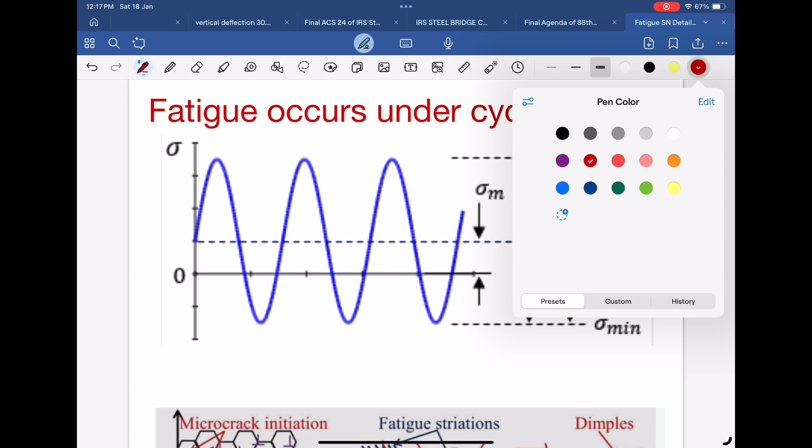Fatigue in steel refers to the phenomenon where a material experiences failure under repeated or fluctuating stresses that are well below its ultimate tensile strength.

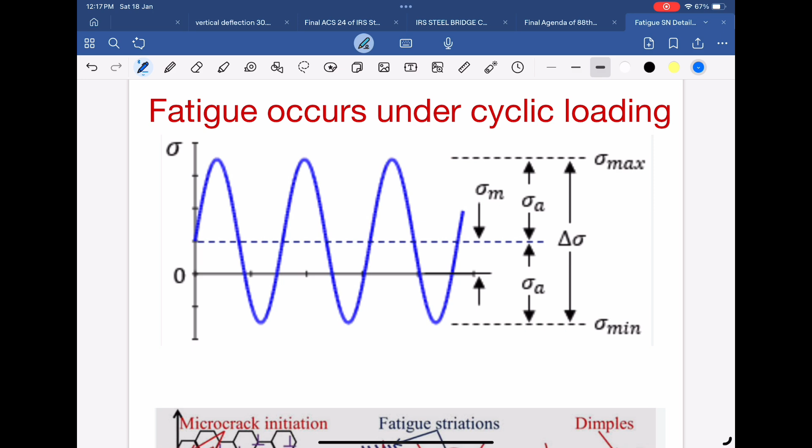This process occurs due to the progressive accumulation of damage within the material, typically initiated at microscopic defects such as cracks, inclusions, or surface irregularities. Over time, these imperfections grow larger with each stress cycle, eventually leading to fracture.

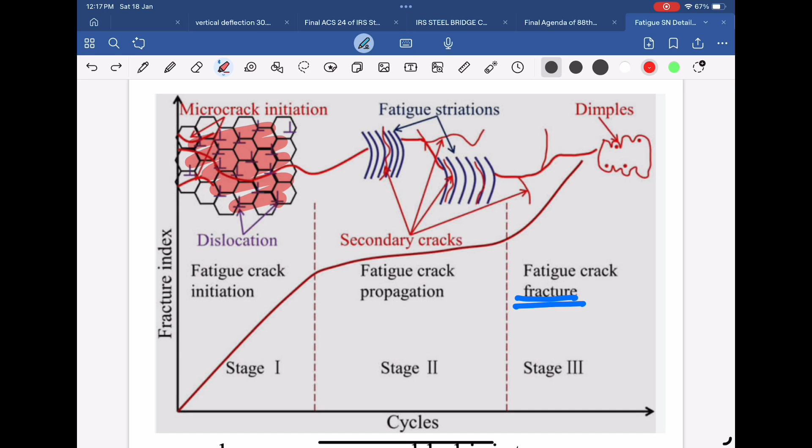Fatigue failure is not instantaneous. It develops in stages. Initially, tiny cracks form at high-stress concentration points, such as sharp corners, welded joints, or surface scratches. In railway girders, it typically starts from rivet holes or bolt holes.

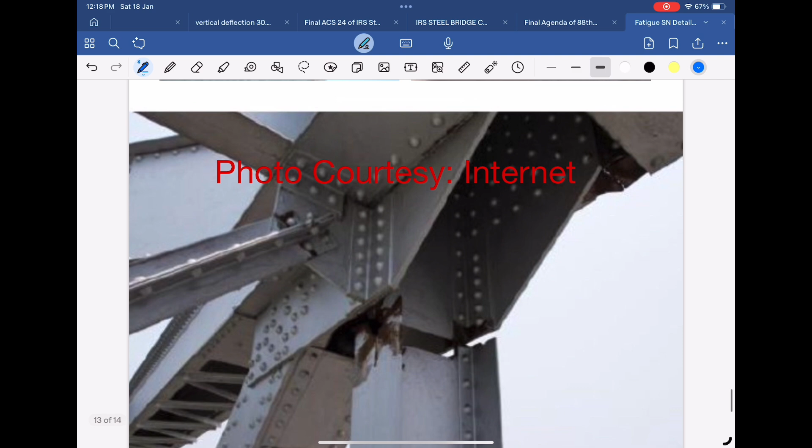These cracks then propagate incrementally with each cycle of stress. The final stage occurs when the remaining uncracked cross-section of the steel is unable to sustain the applied load, causing a sudden and catastrophic failure. This photo taken from the internet shows one such example.

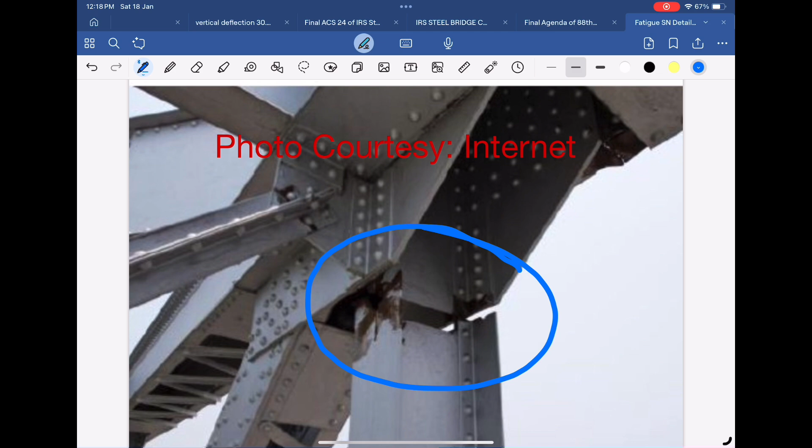With this discussion, we can now appreciate how important it is for bridge engineers to understand the fatigue phenomenon.

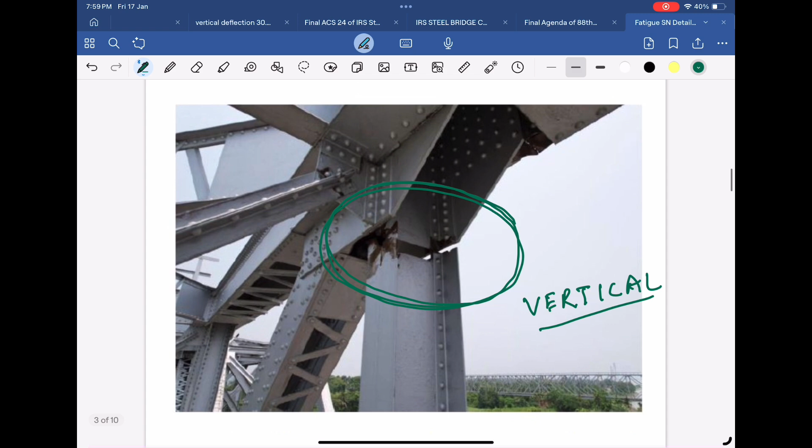With this background, we can start reading the IRS Steel Bridge Code. As per Appendix G of IRS Steel Bridge Code, fatigue in materials is the phenomenon which causes failure of any structural members under the action of repetitive loads.

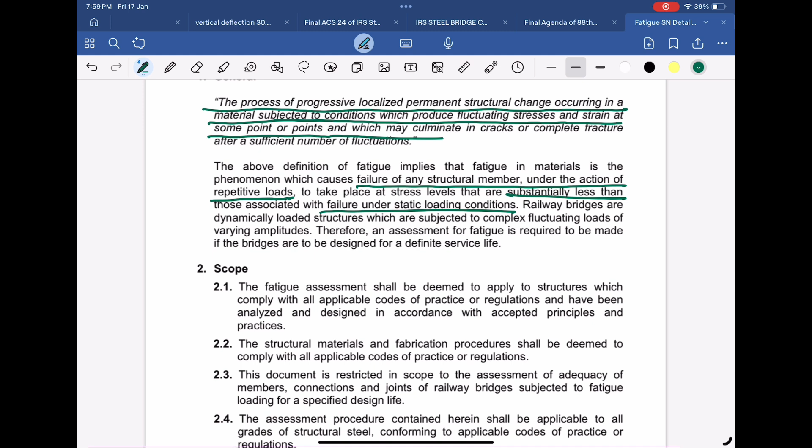Failure of a structural member in fatigue takes place at stress levels that are substantially less than those associated with failure under static loading conditions. For definition purposes, fatigue is the process of progressive, localized, permanent structural change occurring in material subjected to conditions which produce fluctuating stresses and strains at some point or points, and which may culminate in cracks or complete fracture after a sufficient number of fluctuations.

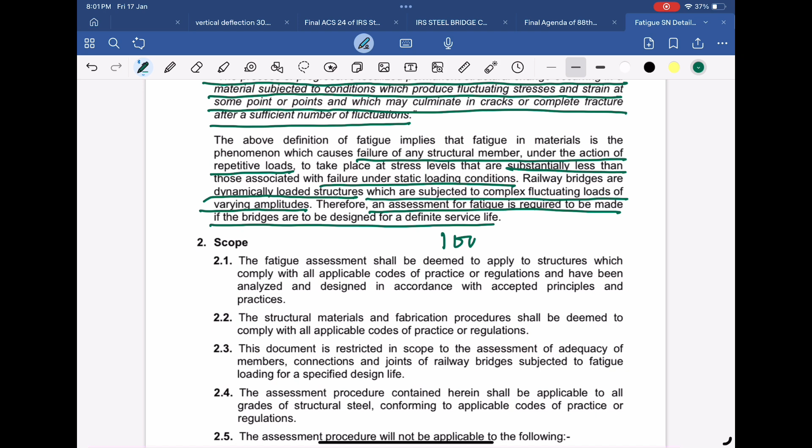Railway bridges are dynamically loaded structures which are subjected to complex fluctuating loads of varying amplitudes. Therefore, an assessment for fatigue is required to be made if the bridges are to be designed for a definite service life. To understand fatigue from a design point of view, first some basic fundamentals need to be understood.

Let's start with the SN curve. An SN curve, also known as a stress-number curve, represents the relationship between the cyclic stress amplitude and the number of cycles it can endure before failure.

The graph plots stress on the vertical axis and the number of cycles to failure on the horizontal axis. To account for the vast range of cycles, from a few to billions, the horizontal axis is typically displayed on a logarithmic scale. The curve usually begins at high stress levels for low cycle fatigue, where the material fails quickly under large stresses. As the stress amplitude decreases, the number of cycles increases, extending the material's lifespan.

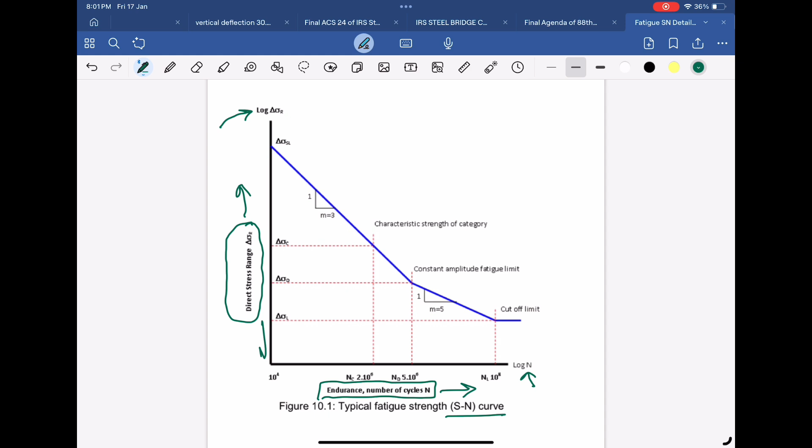For steel, the curve may plateau at a specific stress level, indicating a cut-off limit. Below this stress, the material can theoretically withstand infinite cycles without failing.

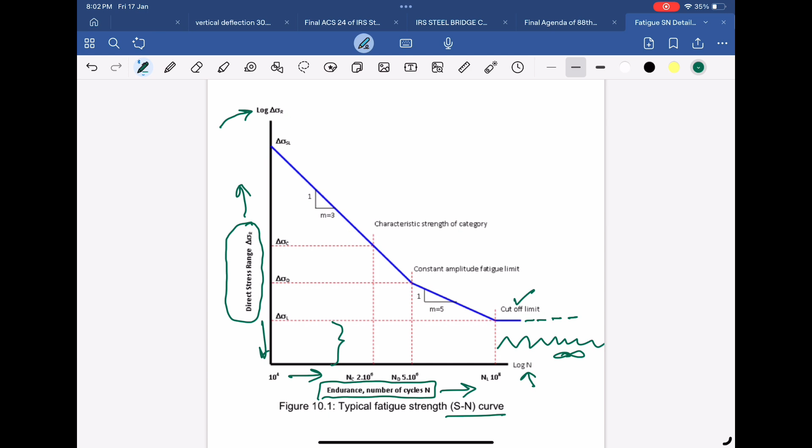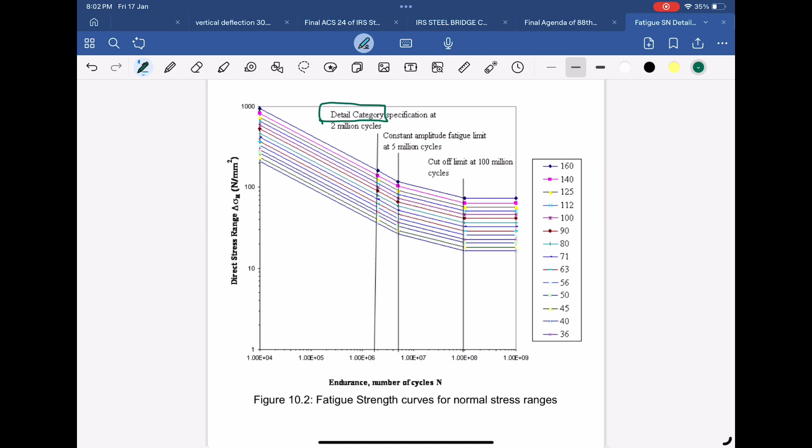In the SN curves given in IRS Steel Bridge Code, you will find that there are many SN curves drawn for different detail categories. It's important to understand what a detail category is. To understand detail categories, we will have to go to Table G-II given at the end of Annexure G.

Detail category refers to a number which represents stress range in Newton per millimeter square, which if applied for 2 million cycles can be sustained by a particular construction detail.

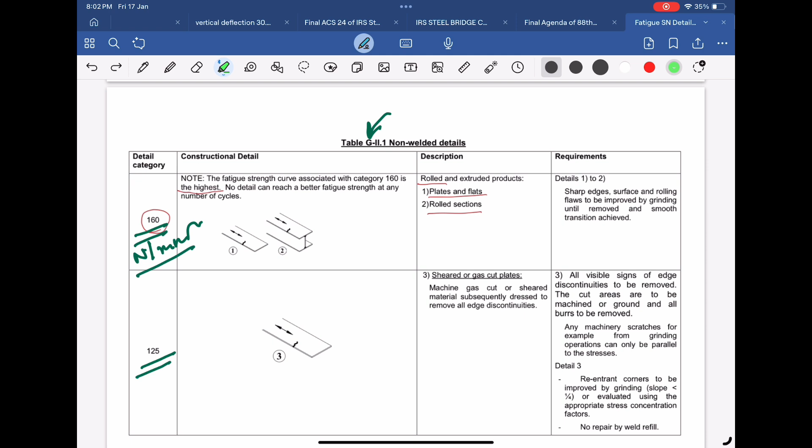Construction detail means the arrangement of steel plates or sections in fabricating a steel bridge member, like cross girder, bottom chord, etc. In essence, how a member has to be fabricated.

It may be a built-up section or a rolled section. It may be connected with other members with the help of welds or bolts and holes, etc. Each such arrangement is basically a detail category.

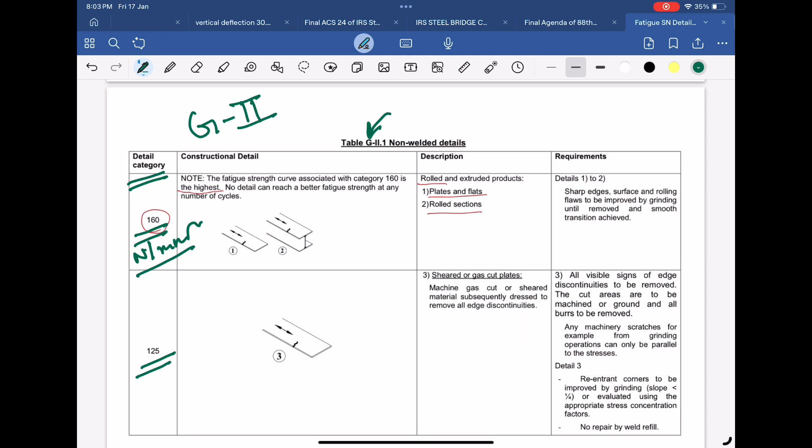All possible types of detail categories are tabulated in Annexure G itself under various tables named G-II. For example, Table G-II.1, which is for non-welded details, mentions a detail category of 160 for constructional detail 1 and 2. This means that a steel structural member made as per constructional detail 1 or 2 can successfully sustain 2 million cycles of stress range of 160 Newton per millimeter square.

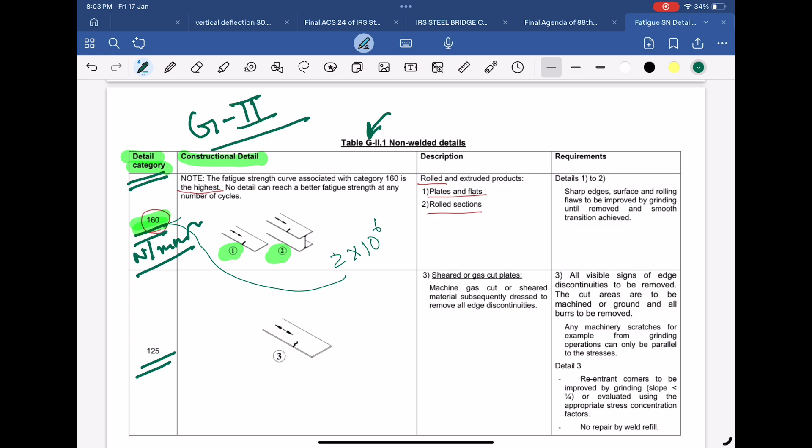Please note that the SN curve is only dependent upon detail category and not on steel grade. Here, detail categories are 36, 40, etc., up to 160, meaning the maximum detail category a construction detail can have is 160 Newton per millimeter square.

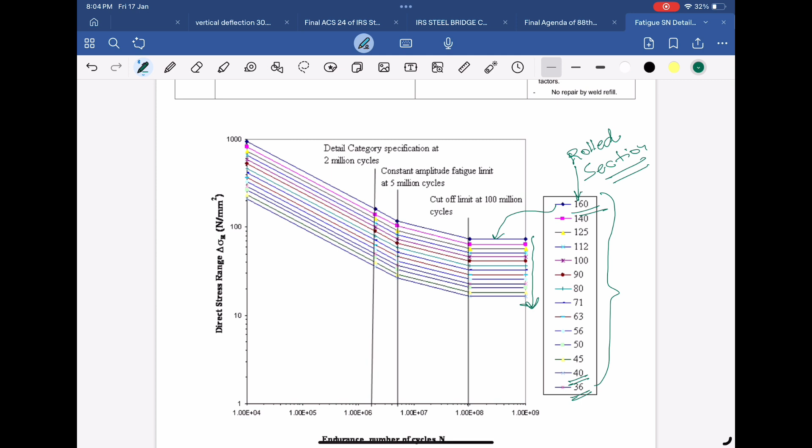This 160 detail category is for rolled steel sections made in factory, which are supposed to have least flaws and irregularities. As we introduce welds, as in built-up sections, and holes for connections, etc., the detail categories keep on reducing. For various construction details, the detail category to be taken may be referred to in Table G-2.

Now let's take an example of the cross girder or stringer of our typical RDSO standard open web girder. It's a built-up I-section with holes at the ends. How to select the appropriate detail category in this case for the purpose of fatigue design?

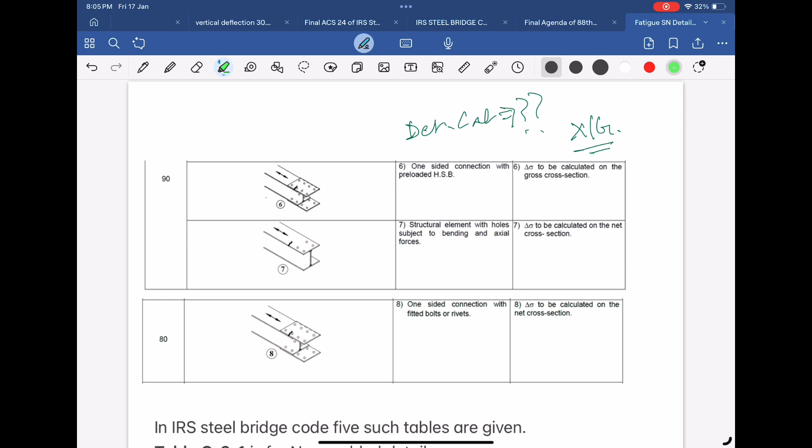In Table G2, there are 3 construction details given which show the I-section with bolted connections matching our requirement of cross girder or stringer. So overall, we have 3 options to choose from: construction detail 6, 7, or 8.

Construction details 6 and 7 have a detail category of 90, and construction detail 8 has a detail category of 80. In fatigue considerations, whenever the exact detail category is not met, the lower one should be adopted. This is legislated in the EN 1993-1-9 code, which is the EN code for fatigue design.

So we will choose a detail category of 80. It means that a cross girder or stringer made as per the chosen construction detail as above can survive for 2 million cycles of a stress range of 80 Newton per millimeter square.

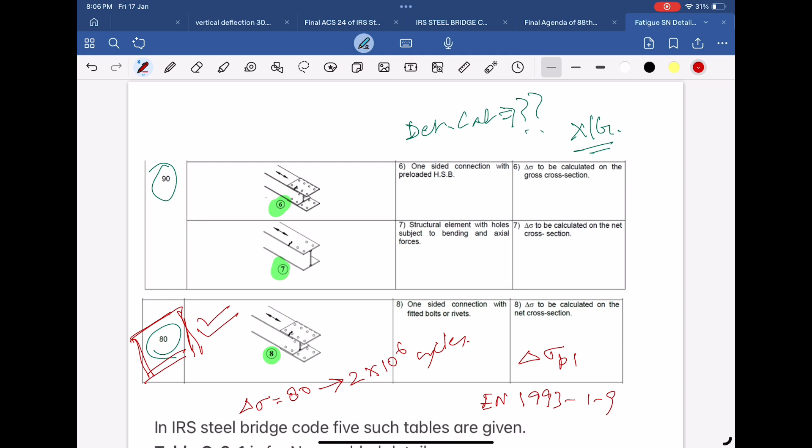It also means that for the purpose of fatigue design, the permissible stress in fatigue shall be taken as 80 Newton per millimeter square. In IRS Steel Bridge Code, 5 such tables are given.

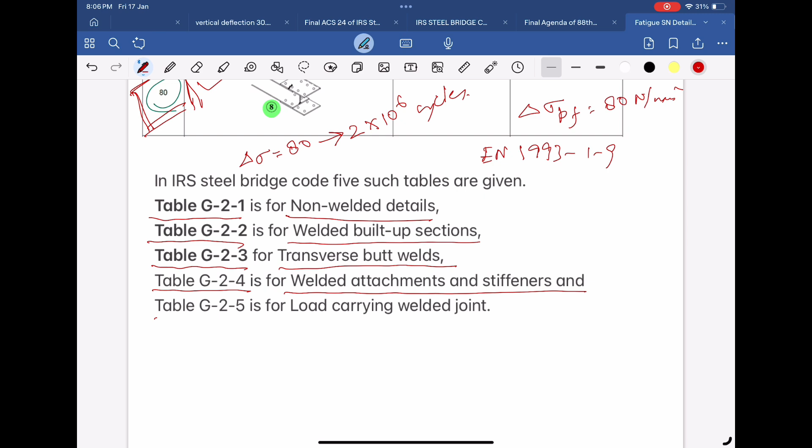Table G-2-1 is for non-welded details. Table G-2-2 is for welded built-up sections. Table G-2-3 is for transverse butt welds. Table G-2-4 is for welded attachments and stiffeners, and Table G-2-5 is for load-carrying welded joints.

It's important to mention here that these tables are exactly taken from the EN 1993-1-9 code for fatigue and were developed after thousands of fatigue tests and real-life design examples.

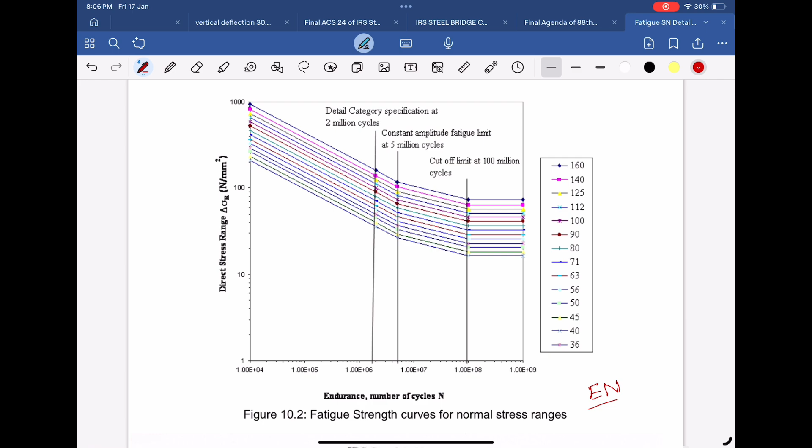The detail categories may appear very conservative, like taking a value of 80 Newton per millimeter square in a steel of grade 250 appears to be highly conservative. But as the bridge has to survive for 100 years, we should not immediately jump to such conclusions.

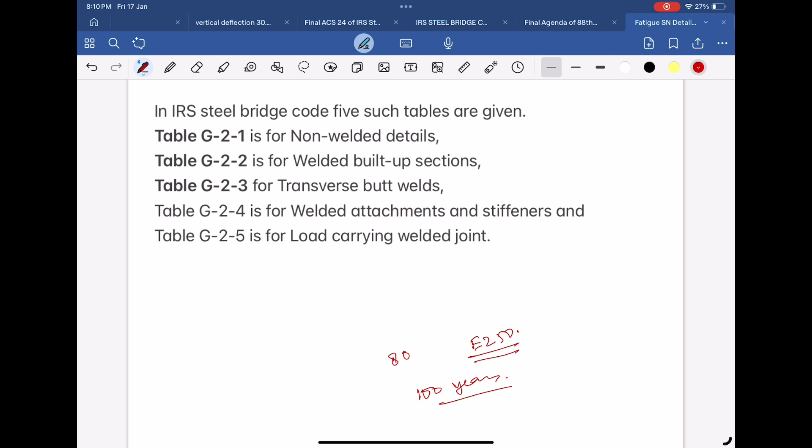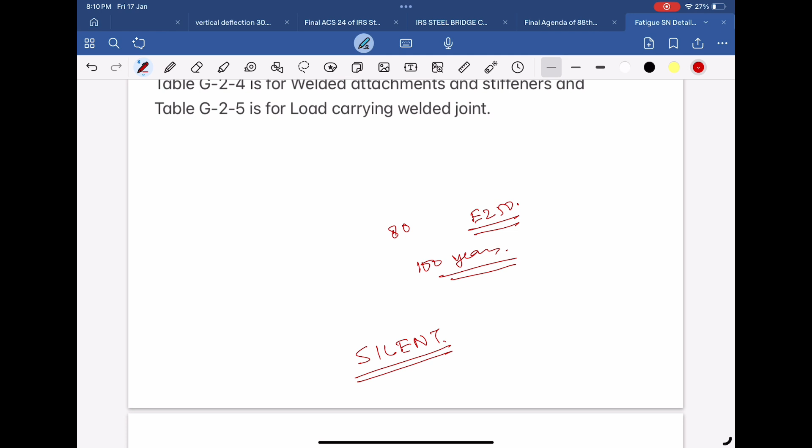Fatigue is a silent phenomenon which remains invisible for a sufficient service life of a bridge. Please note that the detail categories are also basically permissible fatigue stress values used for design, and these are not dependent upon the grade of steel.

The SN curve of structural steel is the same for E250 or E350 or any other grade of structural steel. It is only dependent upon the construction detail, that is, the arrangement of steel plates adopted to form a bridge component.

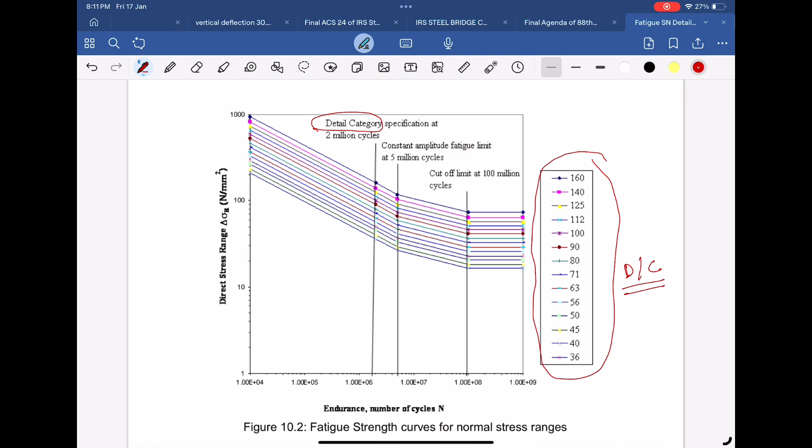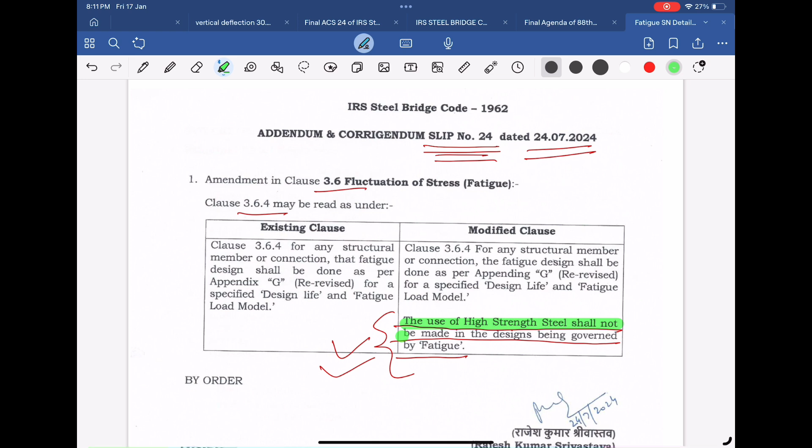That's why the latest correction slip ACS-24 of IRS Steel Bridge Code prohibits the use of steel of grade higher than E250 for designing members which are governed by fatigue.

Tension members, flexural members, and members where reversal of stresses take place are the members whose design is governed by fatigue. Using a higher grade of steel where the section is being decided based upon detail category, which is independent of steel grade, will not result in achieving any reduction in section.

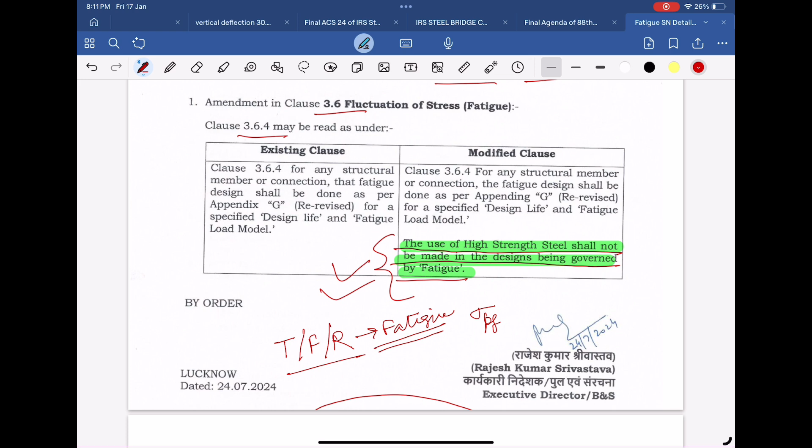For the purpose of understanding fatigue design or calculating residual fatigue life, it is very critical to understand these two concepts of SN curves and detail category. We will understand fatigue design in depth in further videos made on the subject.